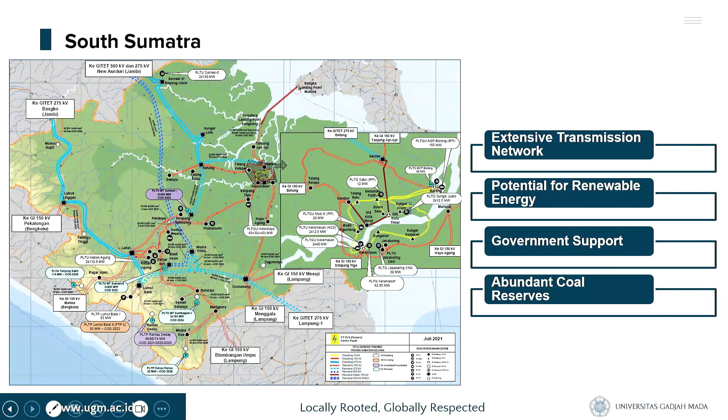Fourth, abundant coal reserves: South Sumatra is rich in high-quality coal reserves. These natural resources are the basis for the construction of steam power plants, or PLTU (pembangkit listrik tenaga uap), which is the dominant electricity production method in the region. So, to support net zero emission goals, we are trying to reduce the use of fossil fuels.

Okay, next I will continue. This is the existing power plants and energy demand forecasting. I will explain the current state of our power plants and the projected energy demand for the future based on the data we have collected.

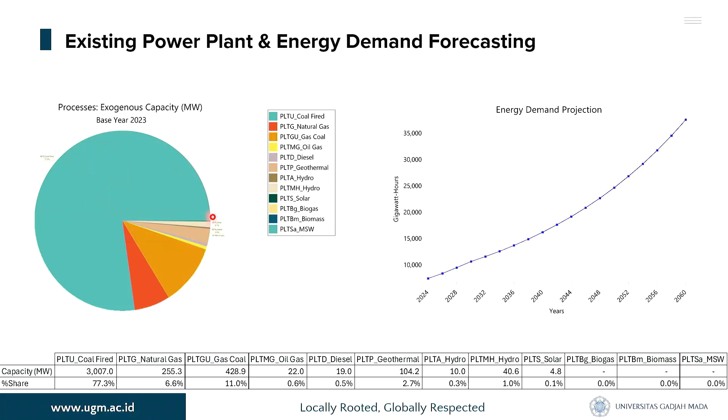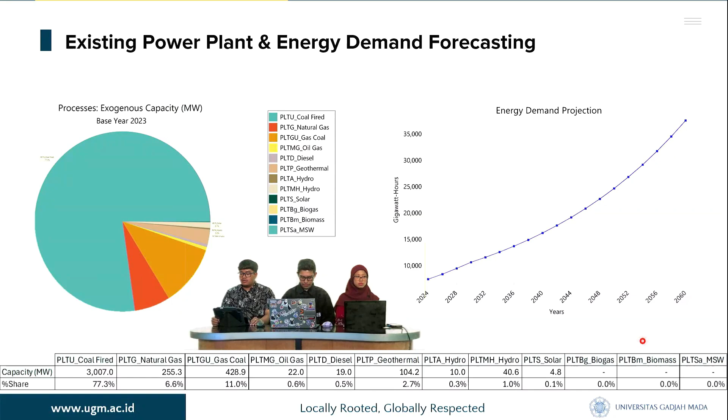Part one is current capacity of power plants. As we can see from the pie chart, coal-fired power plants currently dominate with a 77.3% share of the total installed capacity. This indicates that we are still heavily reliant on fossil fuel to meet our electricity needs. Other types of power plants such as PLTG, PLTGU, and PLTA also have significant contribution, but they are still far below PLTU. Meanwhile, power plants based on renewable energy sources such as PLTS, PLTBG, and PLTBM still have a very small share.

Next, energy demand projection. Looking at the energy demand projection graph, it is clear that the demand for electricity continues to increase year by year. This is in line with economic growth and the increasing use of electricity in various sectors.

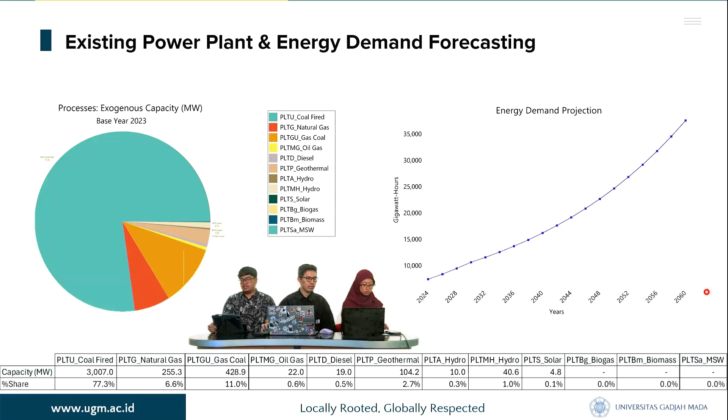So based on the data we have, we can conclude that Indonesia is still heavily dependent on fossil fuel, especially coal, to meet its electricity needs, and the demand for electricity continues to increase along with economic growth and improving living standards. Although still small, the potential for developing renewable energy in Indonesia is enormous. Next, so next is South Sumatra energy policy.

I will be presenting about the National Electricity Supply Plan, or RUPTL, which is our roadmap for power plant development in Indonesia. For the existing power plants in table A, coal-fired power plants currently dominate the installed capacity, especially in the Sumatra system. This indicates that we are still heavily reliant on fossil fuels to meet our electricity needs.

As you can see in the table, PLTU in Sumatra: from PLN we have a total of 4 units with capacity of 260 megawatt, and from IPP there are 10 units, with total capacity of 1,007 megawatt. So next is the recapitulation of power plant development.

In that table, we can see the projection of power plant development until 2030. It is evident that the government plans to continue increasing the capacity of PLTU, especially supercritical PLTU, which are more efficient. In addition, there are also plans to develop natural gas power plants like PLTG, combined cycle power plant (PLTGU), and hydropower power plants.

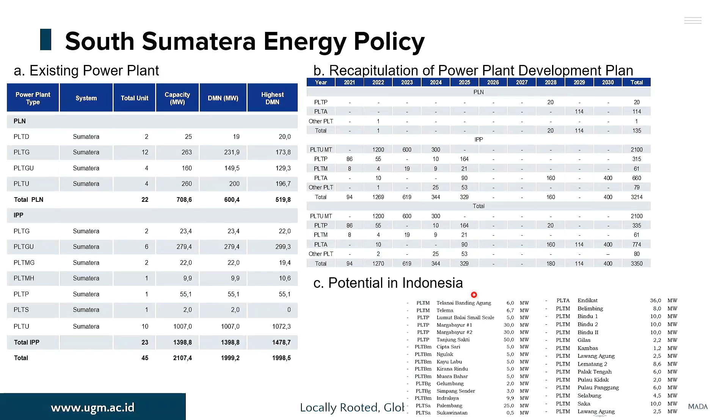Next, in section C, potential in Indonesia provides an overview of the potential for power plant development in various regions of Indonesia. There is great potential for developing solar power plants, wind power plants, and geothermal power plants. So next is alternate energy potential.

There are some energy sources in Sumatra that can be potential capacity. The first one is solar, which has 17,233 megawatt capacity. For bioenergy there is 2,061.4, hydro 1,224, geothermal 964, and for nuclear 2,000 megawatt.

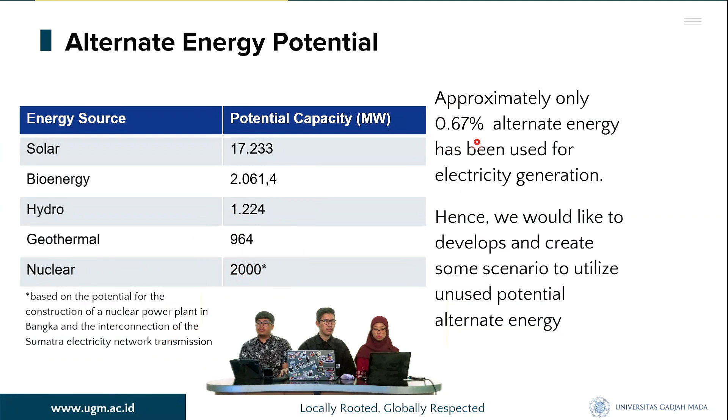This nuclear potential is based on the possible construction of a nuclear power plant on Bangka Island and the interconnection of the Sumatra electricity transmission network. Approximately only 0.67% of alternate energy has been used for electricity generation. Hence, we would like to develop and create some scenarios to utilize this unused potential alternate energy.

Okay, thank you Mas Radit, Mbak Sabrina, for the elaboration. Next session I will take over about the energy mix scenario.

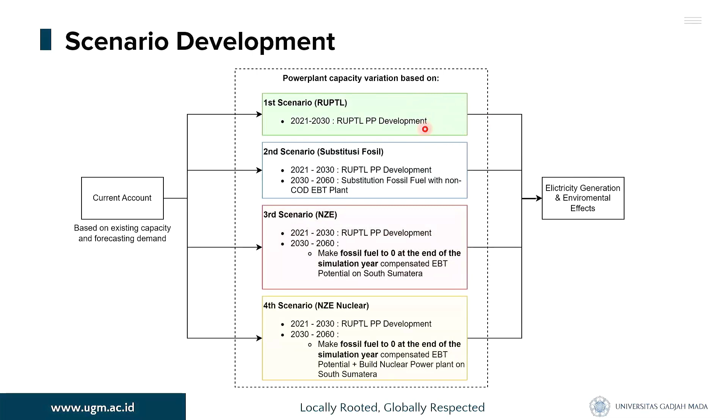In this scenario, I would like to present a model forecasting supply and demand of electricity in South Sumatra using the LEAP application. This model is crucial for understanding how energy needs will evolve in the region and identifying the best approach to meet those needs sustainably, as mentioned by Mas Radit and Mbak Sabrina.

To achieve this, we have developed 4 scenarios as shown in the slide, which will help us analyze different pathways for electricity generation and their environmental effects.

The first scenario is based on the existing RUPTL from Kementerian ESDM in Indonesia, the Electricity Supply Business Plan for the period 2021 to 2030. This scenario represents the continuation of the current strategy without significant changes. It will help us assess how current policies will affect electricity capacity and environmental impact over the next decade.

For the second scenario, we consider a shift from fossil energy, which will be gradually replaced by non-COD, or non-commercial-operation-date, renewable energy plants. The aim in this scenario is to explore how substituting fossil fuel with renewable energy could reduce environmental impacts while maintaining the energy supply.

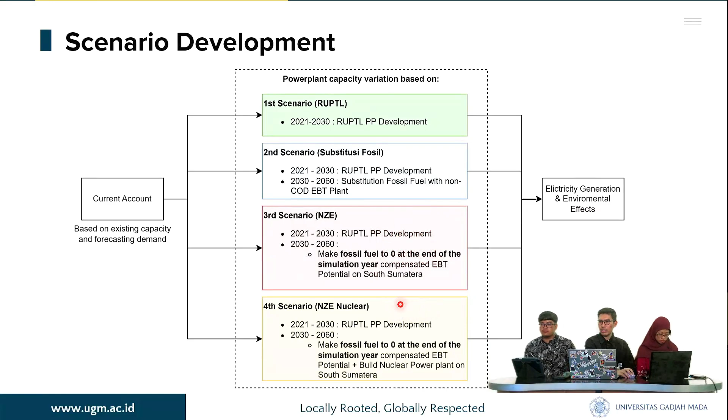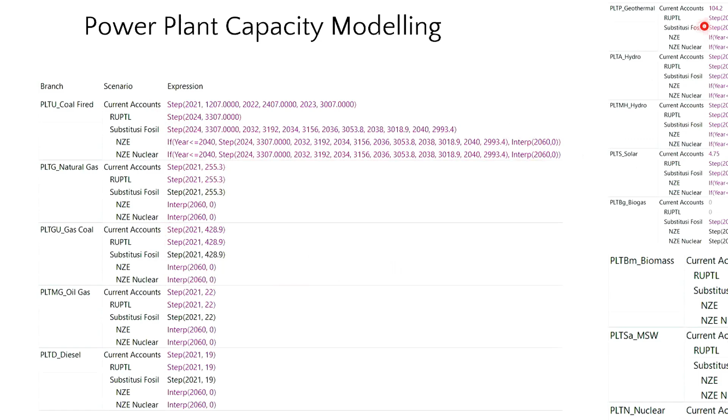For any type of power plant, such as geothermal, hydro, mini hydro, solar, and biogas, we define capacity lifetime using the step and interpolate function to simulate changes over time. This power capacity modeling is a data-driven approach that provides flexibility for comparing different scenarios and helps us evaluate how different energy sources will evolve in the long term.

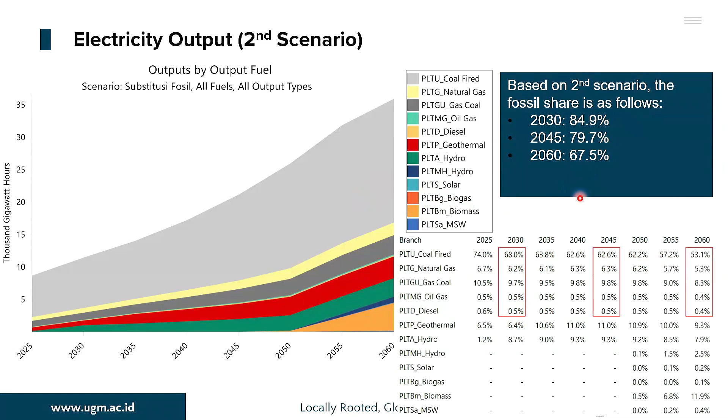In 2030, as you can see in this box, fossil fuel share remains high at 84.9%, similar to the first scenario. However, by 2045 the share drops to 79.7%, and by 2060 the fossil share is 67.5% of total energy output.

This reduction is largely due to increased investment in solar, hydro, geothermal, and biomass energy. In this scenario, which we ran on LEAP, we highlight proactive energy policy, where renewable energy plays a much larger role in meeting energy demand over time. The decline in fossil fuel is primarily driven by government regulation and market trends for clean energy, pushing toward a more sustainable and diversified energy future.

Next, the third output of our scenario is about net zero emissions by maximizing renewable energy potential in South Sumatra. By 2060, fossil fuel has entirely phased out, or 0%, replaced by renewable energy that fully dominates the energy mix over the years, aligning with the net zero emission scenario goals. Specifically, fossil fuel share is reduced from 84.4% to 0% by the end of the simulation.

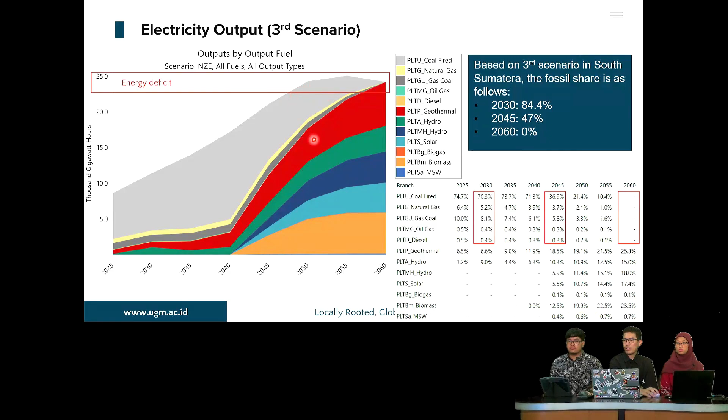In this scenario, we encounter some challenges, that is energy deficit, as you can see in the left graph, because the demand for energy in our scenario forecasting in 2060 reaches up to 35,000 gigawatt hours, but the energy produced in this scenario is only 25,000 gigawatt hours. This deficit occurs because the projected energy demand in coming years is higher than the supply provided by the power plant capacity we modeled for future years.

This deficit comes because a large portion of fossil-based power plants, such as coal and natural gas, are used as base load in the electricity network, meaning they operate continuously to meet the base load or essential level of electricity demand in South Sumatra. By removing this fossil fuel, it creates an energy deficit in South Sumatra.

I think from the third scenario here, we need strategic action such as integrating advanced storage technology, or maybe improving grid infrastructure and energy import. That will be essential to ensure that the transition to renewable energy does not result in significant energy shortage.

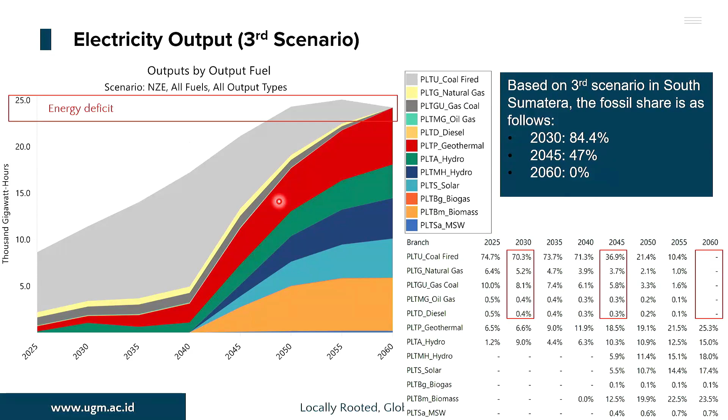Okay, moving to the next slide. This is our last scenario, where we add some extra nuance by introducing a nuclear power plant. In this case, we observe a similar trend as the third scenario, with a gradual shift from fossil fuel dominance in the early years to being replaced by new and renewable energy.

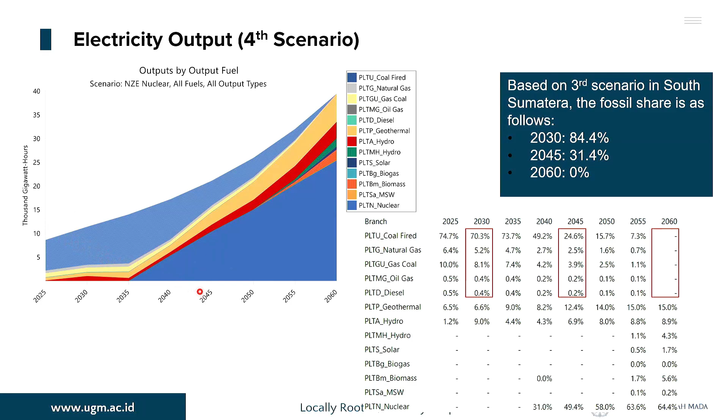However, in this scenario, nuclear energy begins playing a crucial role from 2040 to 2060. While fossil fuels such as coal, natural gas, and others still dominate in the early years, in 2030 the share is 84.4%, by 2045 it's down to 31.4%, and by 2060 it's down to 0%.

Notably, by the end of the simulation in 2060, we see that energy output is predominantly supplied by nuclear energy, at 64.4%, followed by hydropower, solar, and geothermal, indicating a diverse and sustainable energy mix that aligns with the goals of reducing greenhouse gas emissions and achieving energy security.

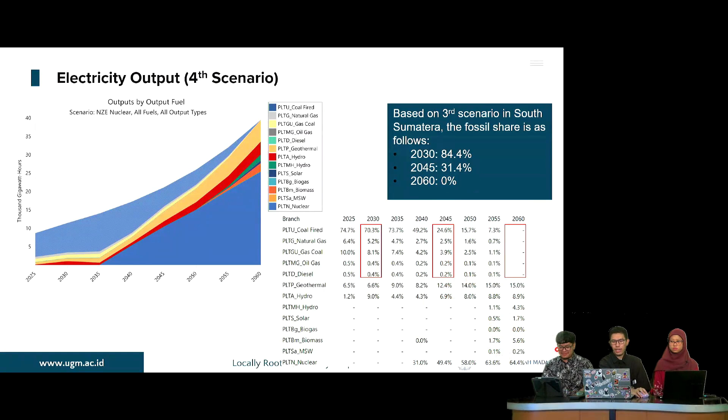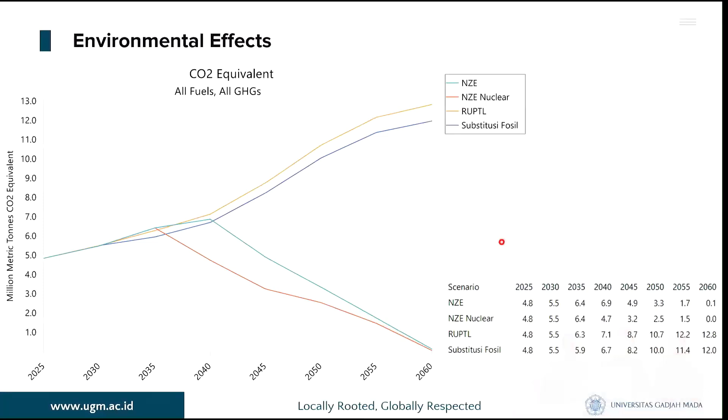So from the four scenarios that have been developed, we look into the environmental effect over the years. In this slide, we're analyzing the environmental impact from the four scenarios in terms of CO2 equivalent generated in energy production by various power plants. The graph shows the CO2 projection from 2025 to 2060.

But in the net zero emission scenario, either the third or fourth scenario, by introducing nuclear, we see the most significant reduction in CO2 emissions, with the nuclear scenario reaching net zero emissions the fastest. From this graph, we conclude that net zero emissions can reduce the environmental effect, but aligning with the energy output from the previous scenario, the third scenario, I think the net zero emission by introducing a nuclear power plant is more suitable to implement in South Sumatra.

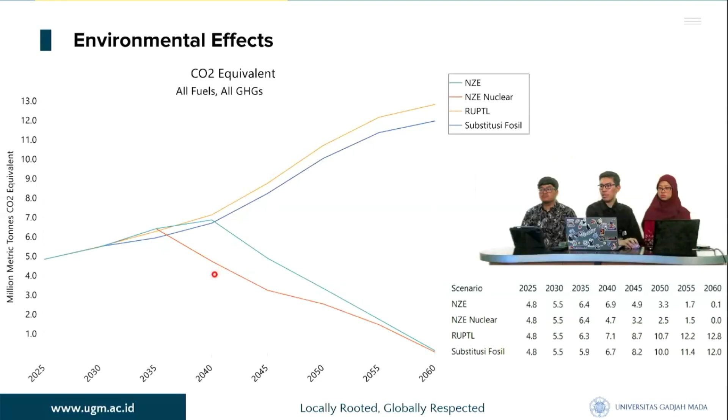Next, the conclusion will be presented by Mbak Sabrina. Thank you, Mas Farhan.

Okay, conclusion number one: South Sumatra presents significant investment potential in the energy sector due to its extensive transmission network, abundant renewable energy sources, and government support. Also, efforts are being made to reduce reliance on coal to support net zero emissions.

Two, Indonesia remains heavily dependent on coal for electricity, but increased demand and significant potential for renewable energy highlight opportunities for a more sustainable energy future. Three, Indonesia remains heavily reliant on coal for electricity, while the government focuses on improving power plant efficiency and exploring the potential for renewable energy development.

Four, only 0.67% of Indonesia's alternate energy potential is used, highlighting the need to tap into this as-yet unused renewable source.